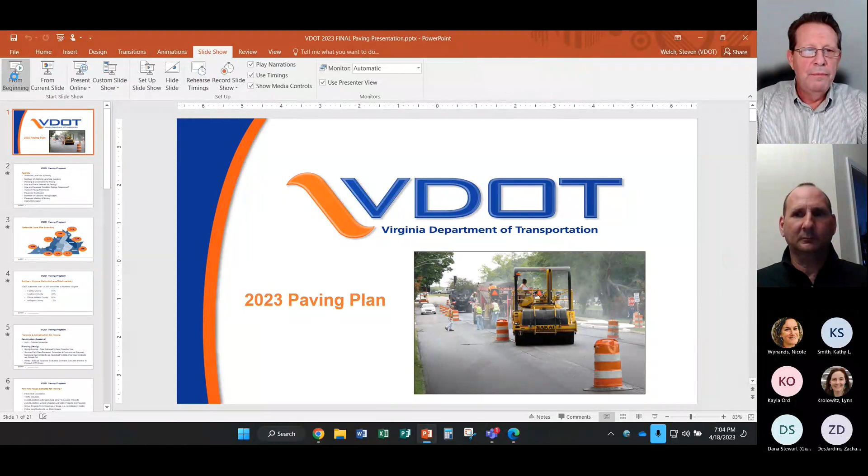All right. Thank you, Zach. Give me a moment to share my screen. Okay, great. Let's see here. All right. Can everyone see a screen that says VDOT 2023 paving plan up front?

Yes. Okay, great. So I'm Steve Welch. I'm the Assistant District Administrator for Land Use and Transportation for the Northern Virginia District, and I'm here tonight to present our 2023 paving plan, which is something we do every year, and walk you through how we go about it. I won't go through the entire agenda, but you can see kind of here what things we'll cover for tonight. In the interest of time, I'll just carry on to the next slide.

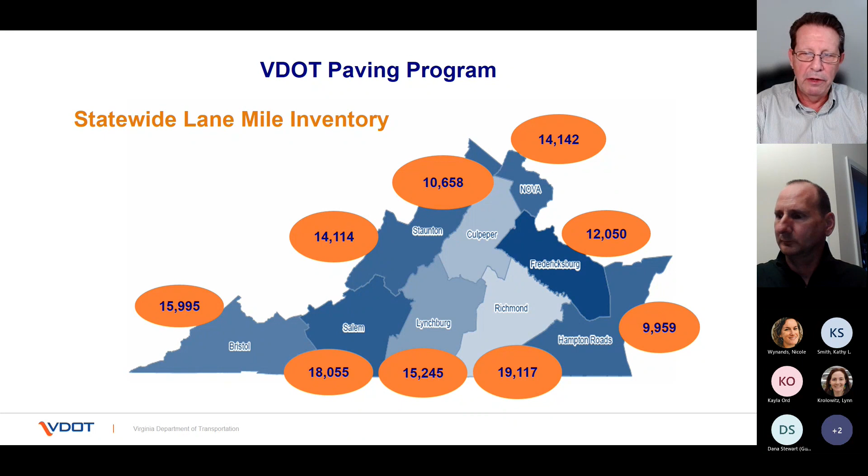So in Northern Virginia, we have over 14,000 lane miles of asphalt and paving. Our district in Northern Virginia consists of Prince William, Loudoun, Fairfax, and Arlington counties. Each year, Fairfax County comprises over 51% of those lane miles, where Loudoun is about 25%, Prince William is 22%, and Arlington is only 2%. The reason Arlington is only 2% is we manage only the interstates and some of the primary roadways, Route 1 in particular, in Arlington County, whereas Arlington County otherwise manages their own roadways.

So of the 14,000 lane miles, we have over 7,500 lane miles in Fairfax County.

So each year we start this process, and we are starting now in the construction season, which is typically April to about October, November. We got a head start this year because we've had such warm weather, which is a good thing for us. So we have gotten started a little bit early in March.

But every year, our planning effort begins in the spring and summer, where we start gathering data for the next year. In the summer and fall, we start reviewing that data and schedules. We start actually preparing contracts based on the neighborhoods, streets, and other roadways that we think meet the requirements for the following year's repaving. We advertise for bids and close out our prior contracts. Then in the winter, we receive the bids for the next year, which now we are starting to execute and get underway.

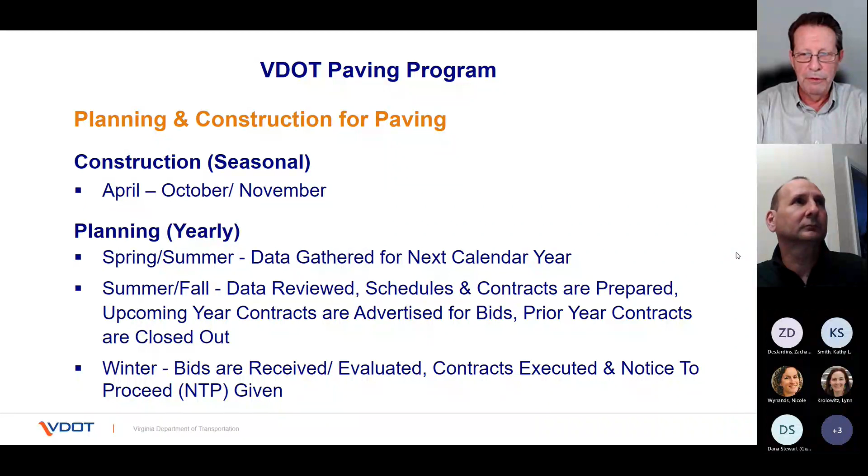One of the questions we always get is how are roads selected for paving? It's not about who complains the most or who calls in the most. It really is a technical analysis.

We do that based on pavement conditions, looking at traffic volumes. Another thing we take into consideration is we try to avoid any known VDOT projects or locality projects coming that may end up tearing up the road anyway. We hold meetings every midwinter with all the utility companies, meaning Washington Gas, water company, and others, about any projects they may have planned.

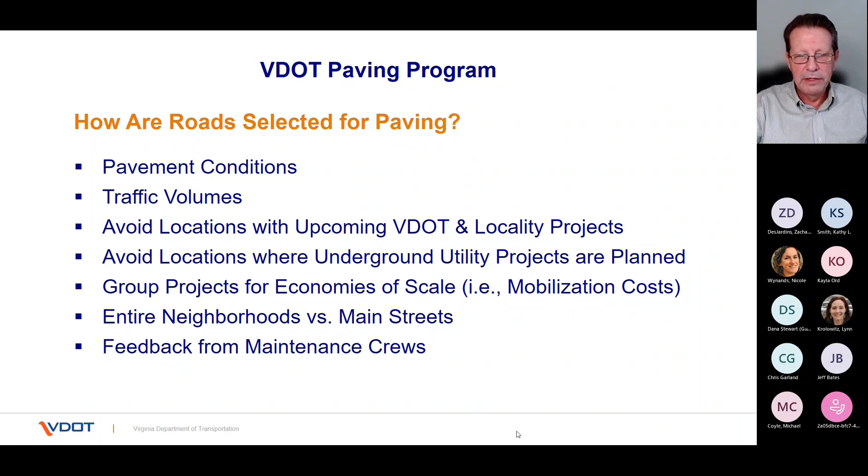So that we're not paving a road that they're going to turn around and cut back into because of having to upgrade utilities. We also try to group projects for economies of scale, mainly mobilization costs, moving equipment from one site to the next. We also look at trying to do an entire neighborhood where we can, and if there's a little money left over, we might do a main street in the adjoining neighborhood close to it for that same reason, as well as getting feedback from the maintenance crews.

So how do we collect the data? This is always the interesting part. We have a truck that's similar to maybe a Google vehicle, but it's an automatic road analyzer with cameras and measuring equipment. It measures pavement distress, roughness, texture, rutting. It does scanning of the roadway. We actually get video and measurements and take imagery and, of course, GPS along the way.

And these trucks go around through all the roadways every year for most of our roadways to gather this data. And because every year the data actually changes...

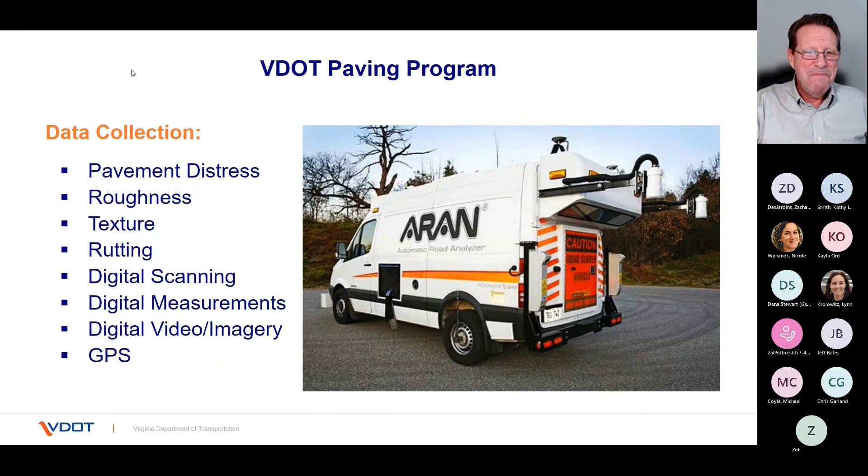We collect that data on interstate roads every year. We also do so on primary roads like Route 1 and others every year. And then on any high volume secondary road, which would be any that has average annual daily traffic, or AADT, of 3,500 vehicles per day or greater. And on the other side, we collect about 20% of the low volume secondary roads, which are typically the neighborhood roads. Neighborhood roads actually make up probably over half of our roadways, and we do about 20% of those each year, so in other words, we gather data on 100% of it every 5 years.

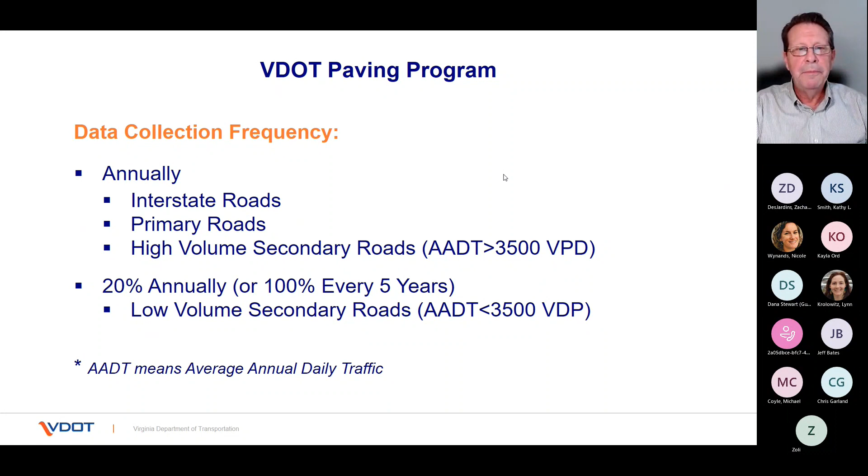So we look at what we call our critical condition index, or CCI, and try to set goals for what we expect our pavement to last and what's most important. Obviously we have to keep our interstates and primary roadways with very high volumes up to par. Then we work our way down to the high volume secondaries and then the neighborhood roads, with 60 being the lowest we target for.

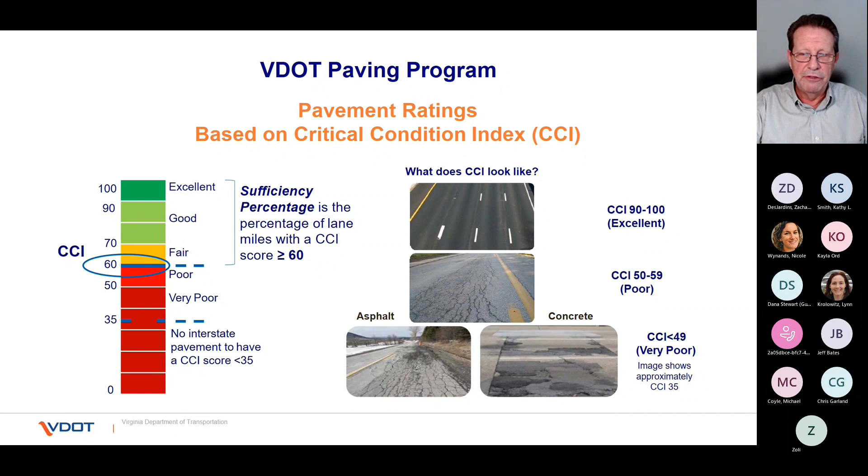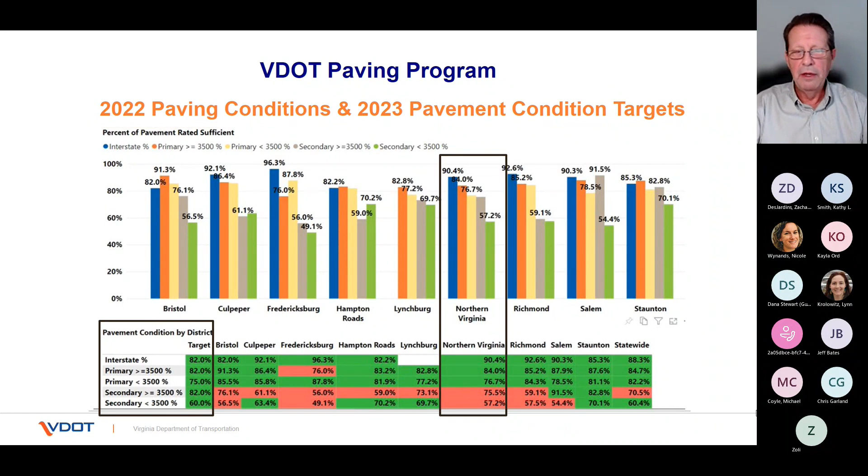So each year we establish our goals for that target requirement. On the left side of the screen, we set an 82% target for our interstates and primaries, 75% for our low volume primaries, 82% for high volume secondaries, and 60% for our low volume secondaries or neighborhood roads. In red, you can see where we've not quite yet met that requirement. So those are what we target when we put together the paving plan for the upcoming season, which is, of course, right now, this season we're talking about tonight.

How do we do this? Well, in some cases we do provide preventive maintenance where we do what's called a slurry seal. It's laying down a type of latex material. Then our contractors come back with a very small stone that's brushed in, and then it's swept away. It's a bit of a lengthy process, but it does help the pavement statistically last another 5 or 6 years overall.

Most of our work, however, in our terminology as engineers, is plant mix, which is milling the roadway anywhere from 1 to 4 inches in depth, and then repaving that roadway with new asphalt pavement. On occasion we find some roadways that are very bad that we end up having to do a full depth reclamation of the pavement. I will say that only happens maybe on one roadway in our district each season.

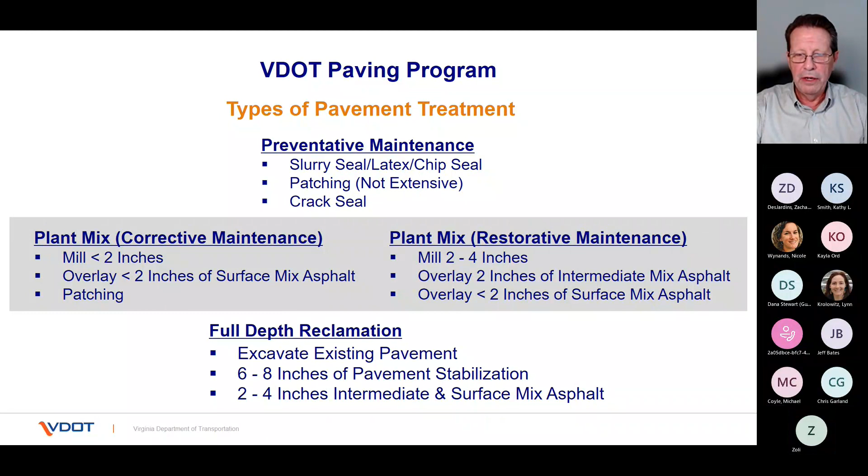Our budget is allocated by the Virginia General Assembly, which determines what's given to the state and to the Virginia Department of Transportation, and thus to our maintenance department to divide up how we use it.

The 2023 budget for our paving this year is $123 million, a little more than last year. But with certain economic conditions, our money isn't going as far. We're paving about 954 lane miles of roadway, on par with the last 4 or 5 years, but it's coming out at $129,000 per lane mile versus prior years because of inflationary pressures we're all experiencing.

One thing I wanted to note is that where we separate interstate, primary, and secondary roads, we are putting 80% of our maintenance or repaving money on the secondary roadways.

Overall, our infrastructure maintenance teams have determined that roughly 43% of our low volume secondary roads, which are really our neighborhood roads, have ratings of 30s to 40s, which are very poor condition. We are playing catch up, doing the best we can with the budget we have. At current funding levels, we pave about 6% of the road network each year, and we continue to catch up as diligently as we can.

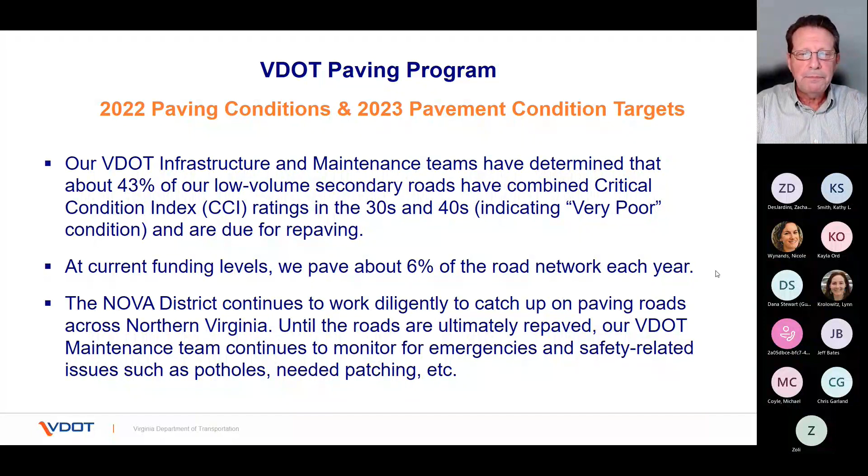In a couple of minutes I'll show you our interactive GIS paving plan. This map is a screenshot of what roads are getting paved in Northern Virginia this year. Everything in red is scheduled, everything in green is in progress, and we got an early start in March. In some places you'll see blue where it's already been completed. I'll go back after I'm done and demonstrate how to use that paving status plan.

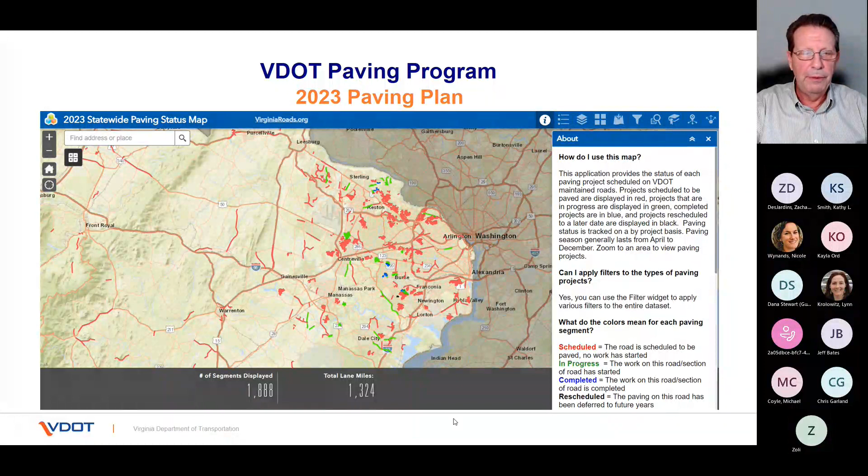Moving forward, our paving contracts are literally for paving and remarking. The contractors are hired to replace paving and replace in kind the existing striping. We do pay them a little extra to make minor adjustments, like adding edge lines along the sides of the roadway where they may have been missing. In some cases we'll adjust crosswalks where they weren't quite lined up well, or change 2-line crosswalks into high visibility crosswalks, which have a zebra pattern across the roadway. Occasionally, if there's room, we may lengthen a turn lane to add more storage, whether it's a right or left turn lane.

One of the important things is the partnership we've worked out with Fairfax County DOT. Each year during this paving process, it creates the opportunity for Fairfax County to look at on-road bike networks, whether shared lanes, standard bike lanes, or buffered bike lanes, as well as places to put in new crosswalks or change them to high visibility. We also look at what we call road diets, where some roadways with 4 lanes aren't being used as much as they need, or the volume isn't there, so we contract that down to 2 or 3 lanes and repurpose the existing lanes. Zach will speak more to that shortly.

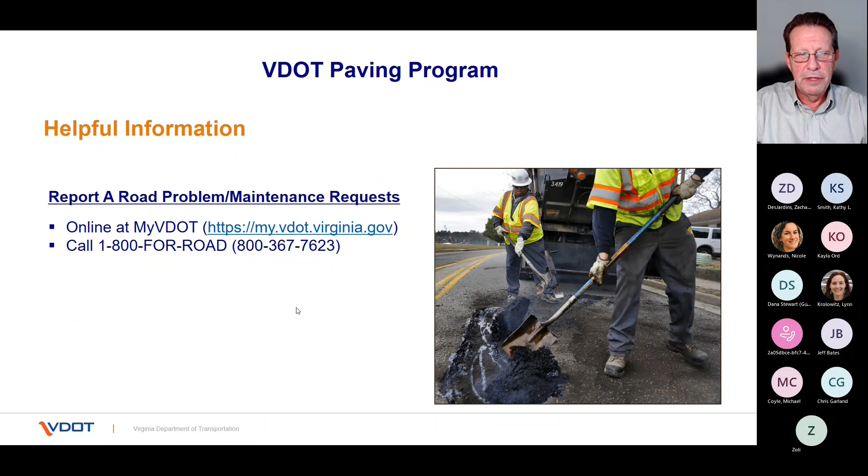At this point I typically back out, but I want to take one moment to show you how that map works so everyone watching can see how to use it.

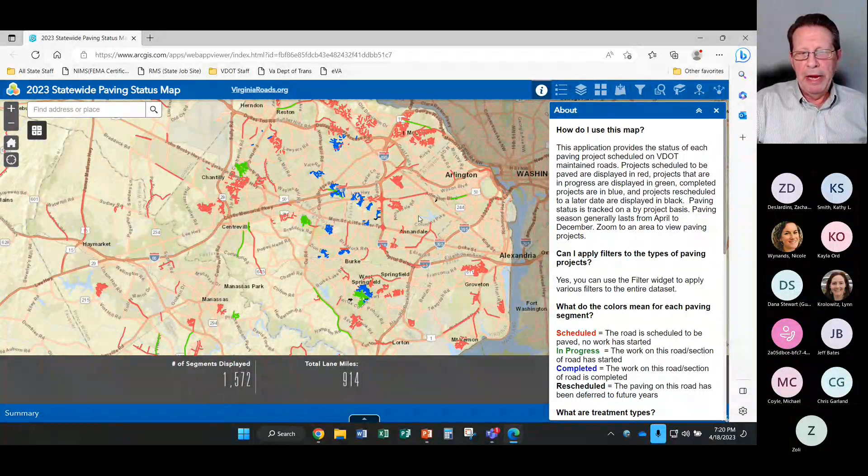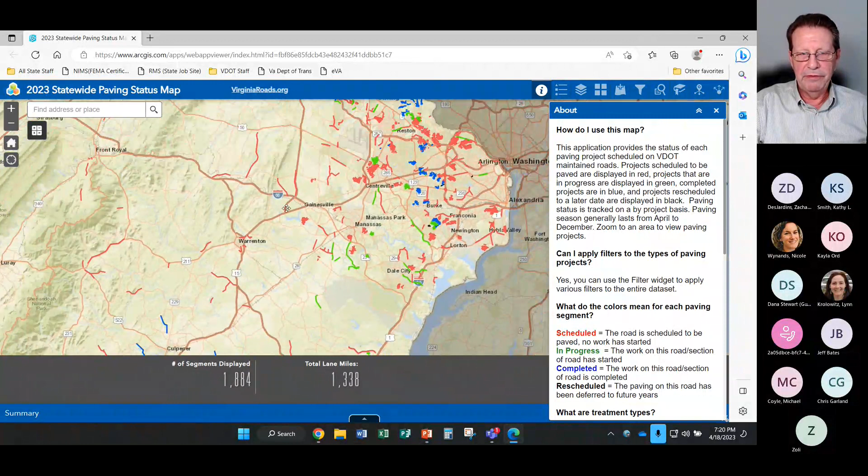This is our GIS-based map that I showed you a static picture of earlier. You can zoom in or out and see what's going on across the rest of the state based on number of roadways and population.

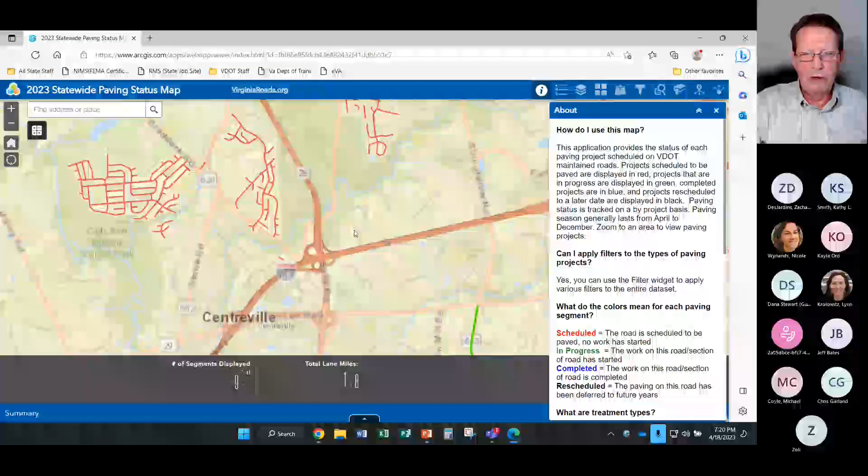Focusing on the Centreville area, you can see certain neighborhoods along Braddock and along 28 and other areas. Up Waverly, I can see other neighborhoods in Chantilly getting a lot of repaving. As I mentioned, we're putting roughly 80% of our budget on neighborhood roads this year, so that's a good thing.

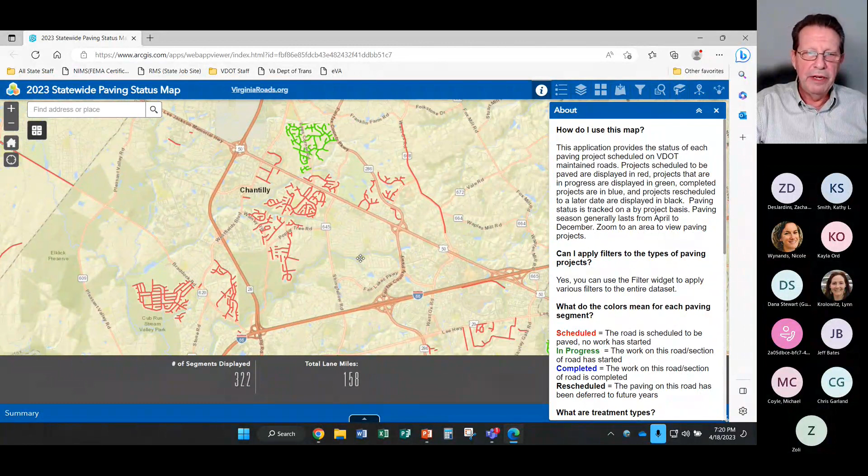One thing this map is helpful with: if you have questions about when a project is going to start, or there's a problem while the project's happening, you can hover your arrow over the roadway and click on it. Up will pop the name of the VDOT project manager, their phone number and email address, and also the contractor working out there. So if you have a question about something going on, you can click this tab on the map and get that information.

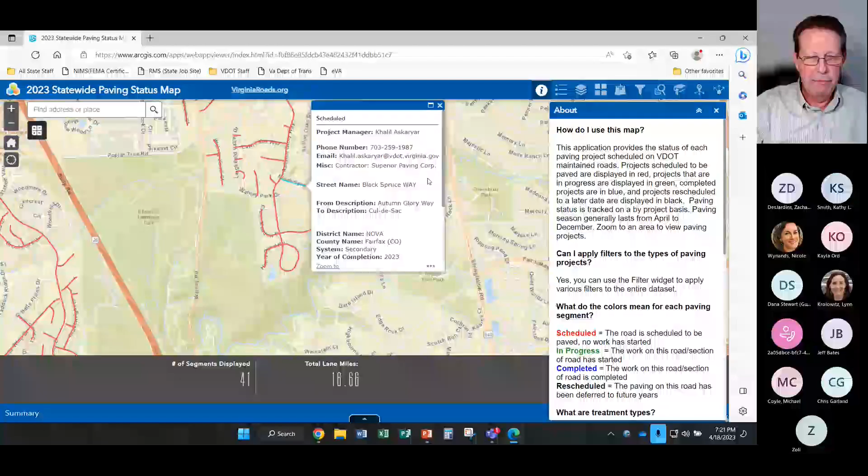That project manager will respond back to you as soon as they can, because they are out in the field moving from site to site, watching and monitoring their contractors.

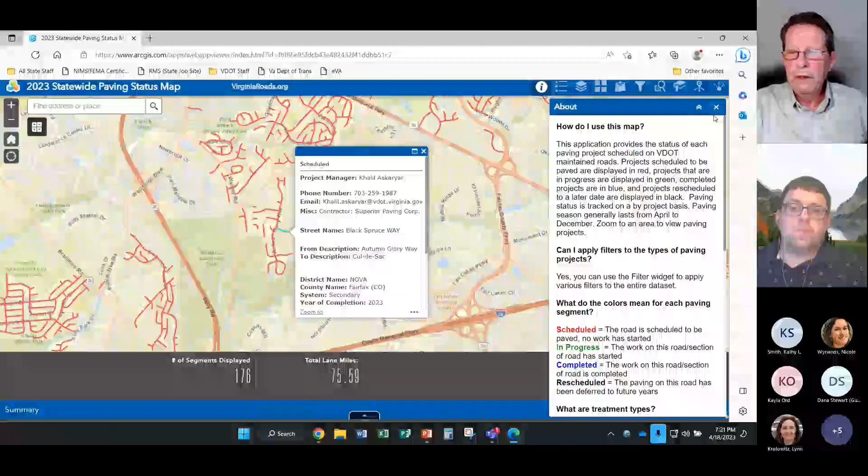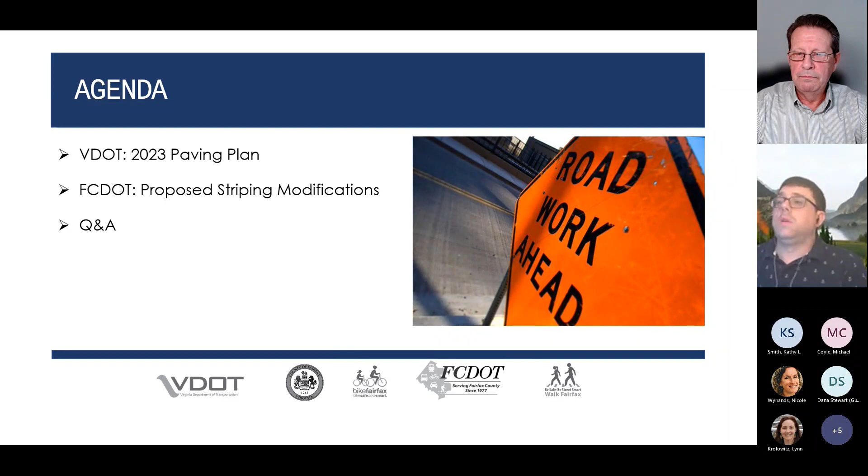Next we're going to move over to Fairfax County DOT's proposed striping modifications. As Steve said, this is a collaboration between VDOT and Fairfax County to improve traffic safety for all users.

We begin by reviewing the draft repaving plan. We identify potential opportunities for improvements such as crosswalk markings, widened shoulders, adding bike lanes, and adding turn lanes where appropriate. VDOT then develops the striping and sign plans and coordinates the implementation with the paving contractors—that's the paving itself that Steve was talking about.

We at Fairfax County DOT then lead the public engagement in coordination with the supervisor. That's why we're here tonight. VDOT also identifies and reconstructs substandard curb ramps, and then Fairfax County will come in after the paving is done and install signage for bike lanes, road diets, or crosswalks.

For crosswalks in particular, we look for potential crossings where people want to cross that don't currently have markings, and determine whether it meets VDOT's warrants for safety, and if minor parking restrictions are needed to ensure people walking in the crosswalk can be seen, as well as see oncoming traffic.

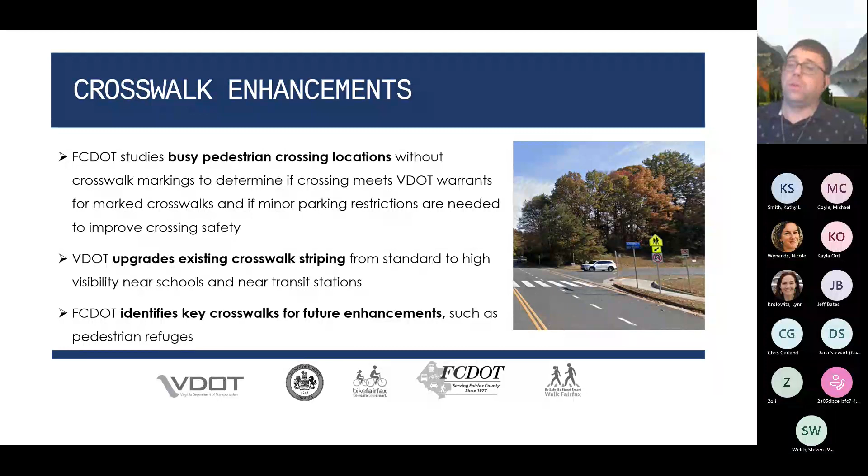VDOT will often upgrade existing crosswalk striping from standard to high visibility. You can see in the example photo on the right a high visibility crosswalk, which typically looks like piano keys or zebra stripes. We also identify key crosswalks for future enhancements such as pedestrian refuge islands.

As Steve mentioned earlier, we look to potentially repurpose underutilized road space. There are many roads throughout the county built with wider than needed travel lanes, or with too many lanes, leading to potential safety issues such as speeding and inattentive driving. Repaving provides an opportunity to right-size travel lanes and roads, and potentially provide new bike lanes and turn lanes to improve safety for all users at very low cost.

We typically strive to maintain traffic capacity at signals as well as on-street parking. This also aids us in implementing our planned bike network.

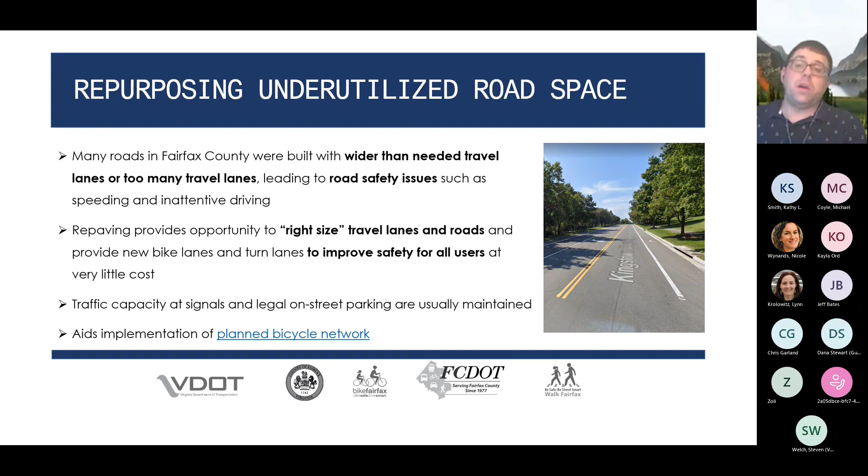For example, one of the streets we previously added bike lanes to in Mason District is Annandale Road. Before, it was a fairly wide road, so people driving felt they could drive very quickly. By narrowing the lanes to the minimum acceptable widths, we were able to reduce some of that speeding.

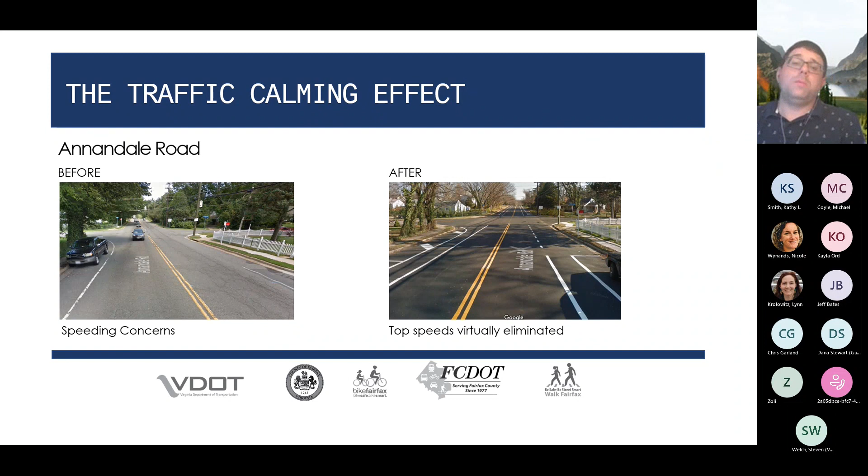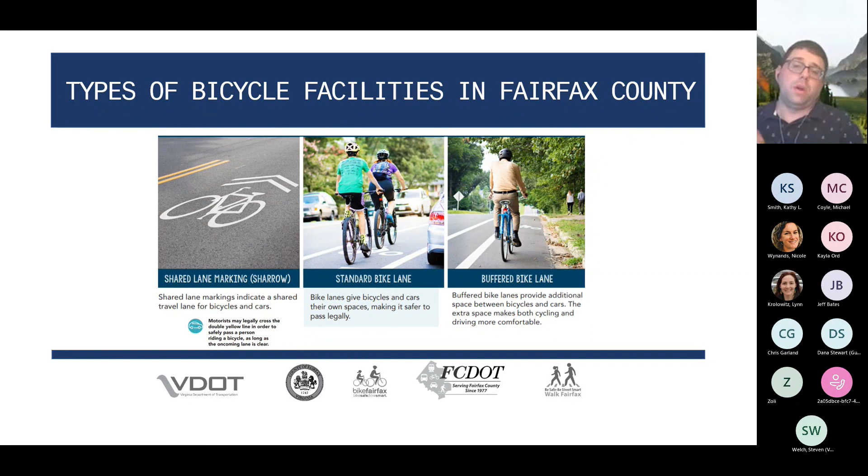As we discussed earlier, these are the three types of bicycle infrastructure we implement during the repaving program: shared lane markings, a standard bike lane, and a buffered bike lane. The buffered bike lane provides a little extra space for people biking between themselves and cars.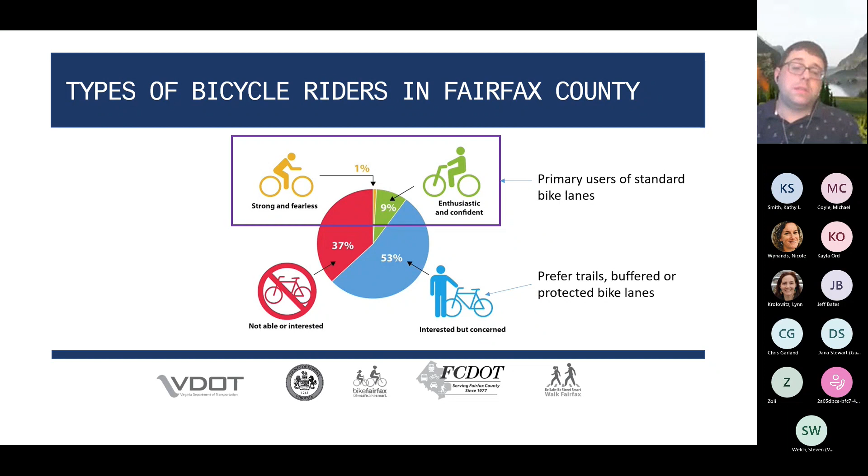Bicycle infrastructure clearly benefits people biking, but there are also a lot of benefits for people driving. If you're trying to cross the street, you have a little extra space to step out before crossing into the travel lane. If you're a pedestrian walking along a sidewalk, it adds a nice buffer between you and moving traffic. Since bike lanes typically narrow the road, they reduce speeding and also decrease noise, since faster driving results in louder noise. They also improve visibility for people getting in and out of their driveways, as well as shopping centers and similar places.

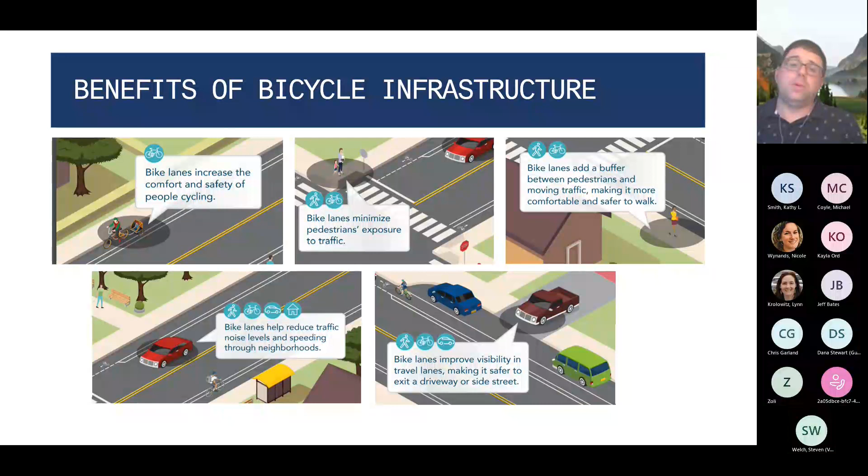Metrotech Drive, as you may be familiar with, runs between Route 50 and Centreville Road. There are 4 travel lanes today, with sidewalks on both sides except for one short block near Route 50, and currently no on-street bicycle facilities.

What we propose is a road diet by repurposing 2 of the 4 travel lanes, so there'd only be 1 travel lane in each direction. It would look very similar to Bluemont Way in Reston, where the county and VDOT also did a road diet several years ago.

So what you'd have is a bike lane on the far right, a buffer where space is available, and then a center turn lane. That center turn lane would get people out of the flow of traffic and keep the main travel lane free, so people can keep going without significantly decreasing the capacity of the roadway.

One of the things we've heard about this section of Metrotech is how difficult it is to enter and exit the shopping center. That left turn lane would help people get in and out of the flow of traffic, so they can safely make a left turn.

If you're trying to make a left turn and have to watch for 2 lanes of traffic instead of 1, this proposal would help, because you'd only need to watch for one flow of cars instead of two. It improves safety for people driving, as well as providing a bicycle connection between the neighborhoods around this shopping center, so people can go through the shopping center area into the other residential neighborhoods.

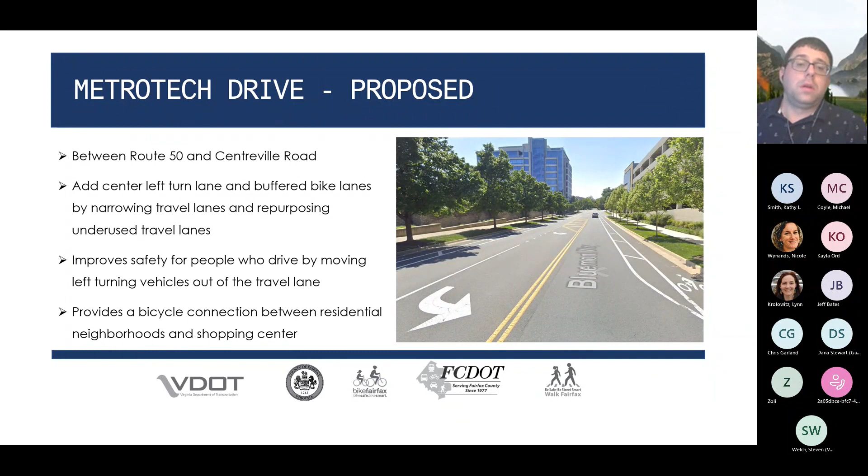So we have a draft study, and we're working with our colleagues at VDOT, such as Steve, to help finalize that study and interpret the results.

If you drive on Metrotech today, you'll probably notice it takes a while to get through the intersection at Route 50. That's because there's a lot more traffic on Route 50, so the signal cycle there is pretty long, and that creates delays.

Since we're proposing this, in order to mitigate the impact and ensure the road diet provides the same amount of capacity as today, we're pretty much going to keep that intersection with Route 50 the same, so that we don't significantly exacerbate the delay that exists today.

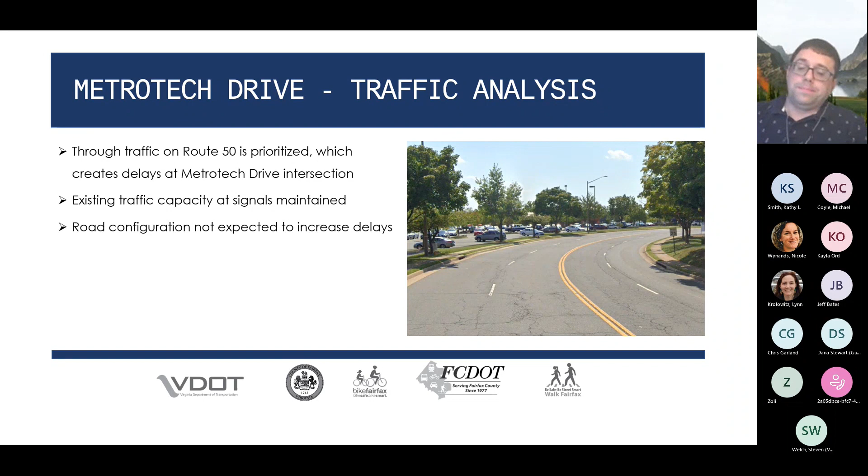Moving further down the street on MetroTech down to Lightfoot Street, we're proposing to add a new crosswalk. This would connect the neighborhood to the shopping center and provide the only mid-block crosswalk on MetroTech Drive. This is the existing configuration where you'd have to cross 4 lanes of traffic. If we're able to get the road diet through, you'd only have to cross the bike lanes, then 1 travel lane at a time, and then the center turn lane. So it'll feel a little bit safer than it is today.

Going down across the street, we wanted to provide a connection between the neighborhood south of MetroTech Drive to MetroTech and through to the other neighborhoods. So we're proposing to narrow this very wide part of Elmwood Street by adding bike lanes. There's sidewalks on both sides. Over time, the street parking—there's no street parking there today. Of course, there are no bicycle facilities.

As I mentioned earlier, the intersection configuration would remain the same, so we still have the same number of turn lanes: a right turn lane, then 3 lanes, and then a left turn lane. The bike lanes that we would propose to add would be buffered, so you'd have a nice space between you and moving traffic.

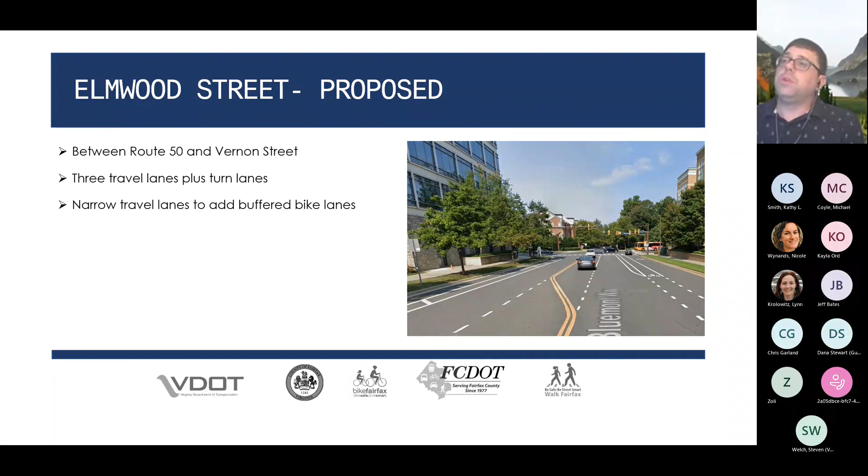Going a little bit further down Elmwood Street, we have a proposed crosswalk at the intersection of Elmwood and Rockland Village Drive. We're proposing, in order to make it safe for people to use this crosswalk, to restrict some parking on the southbound side of the street. We would propose to put up a sign to prohibit parking for those last 3 spaces on Elmwood Street.

If you have any paving related comments, such as drainage, missing signage, signal repair, walkway repair, or sight distance issues due to vegetation—it is springtime, our vegetation is growing—feel free to submit them to my.vdot.virginia.gov. If you'd like to request repairs, click on the 'I need a road repaired' link at that portal, or you can also give VDOT a call at 1-800-367-7623.

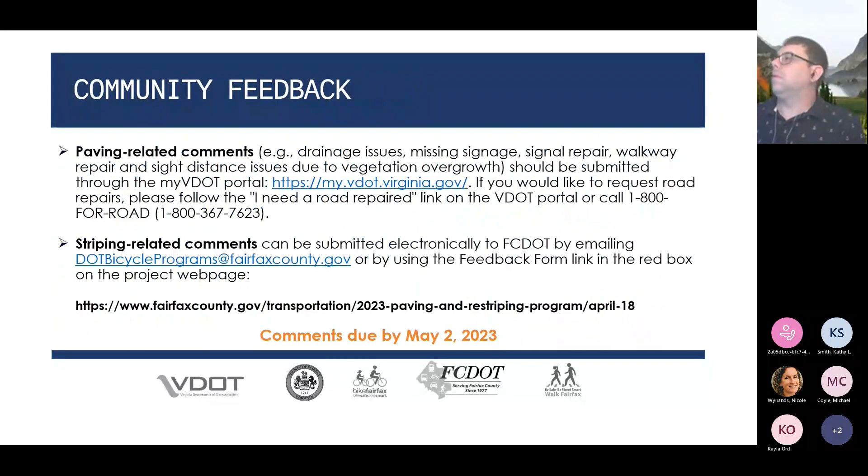Yes, this is Steve Welch from VDOT. Mike, if you could forward to me that location being described, we can do a larger patch, ask our maintenance crews to go out and do a bigger patch than just a pothole patch. Usually that means saw cutting like a 10 by 10 or 20 by 20 area and then repaving it with equipment. So yes, we can do that.

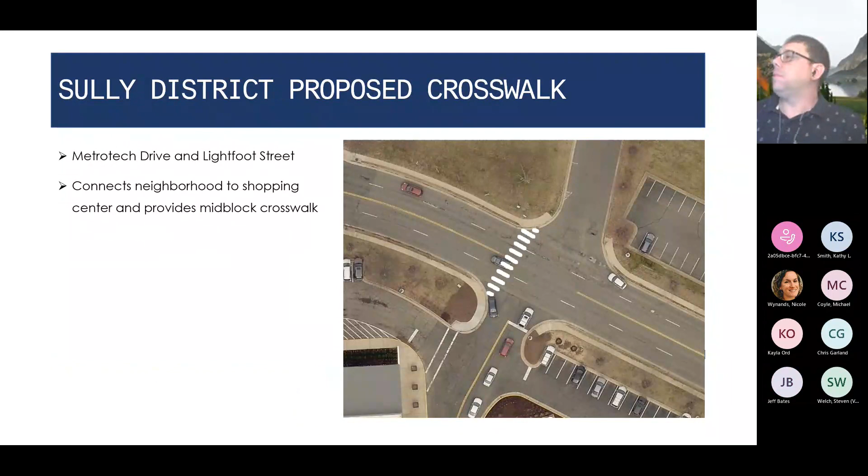Now, my second question is, are they going to disrupt our one-side parking? Because over 20 years ago we requested that we just have one-side parking on Elmwood.

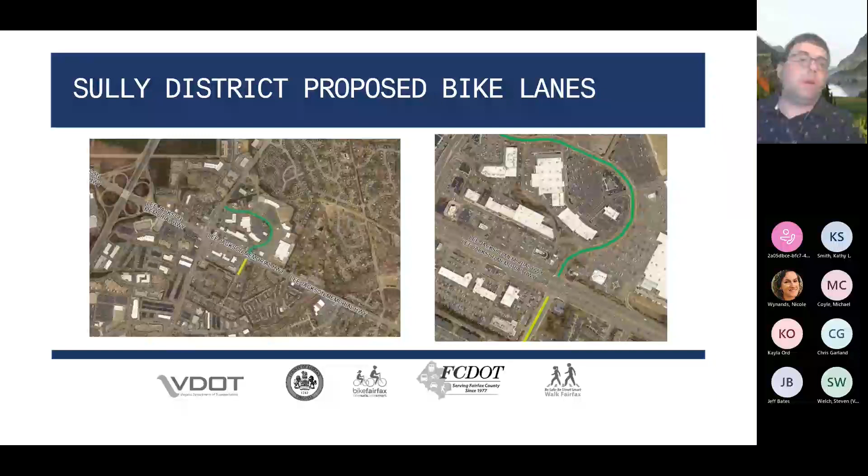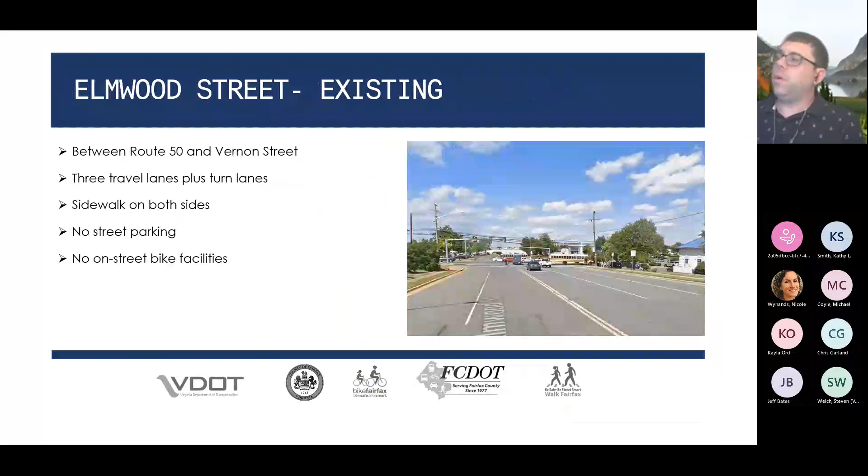So the only section we are proposing to remove 3 parking spaces is if you're going southbound on Elmwood Street and you get to the intersection of Rockland Village Drive. In order to install the new crosswalk, we need to remove 3 parking spaces on that southbound side of the street, just north of the Rockland Village Drive intersection. We'll post the presentation for you tomorrow to look at as well and provide your feedback on that.

Hey Zach, since you have control of the screen, can you just explain the sight distance requirement and why those spaces need to be removed?

Oh yes, absolutely. So in order to make it safe for people to cross the street, we want to make sure that people driving can see you. The reason we picked 3 spaces is because that's the minimum amount of sight distance for the person driving to see you and stop in time if you're using the crosswalk. Using the crosswalk also helps you see oncoming traffic. So that's why we're proposing to remove those 3 spaces.